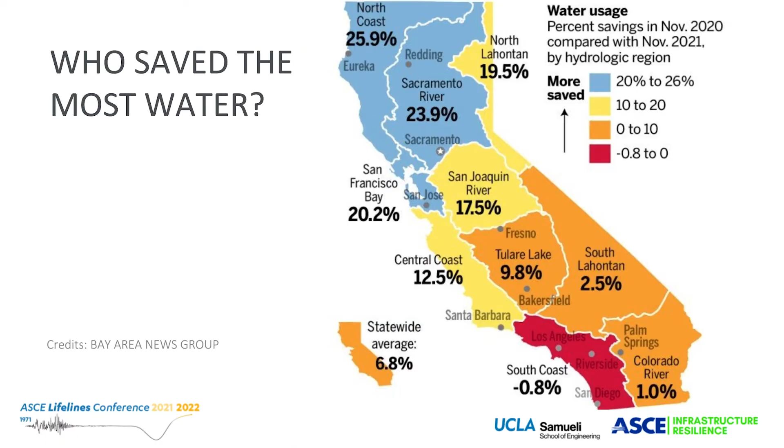So what's the common thread between hosing off your driveway, watering your lawn, and washing your car, spending a lot of water? They all will cause you a fine soon in California because of the drought and the shortage in water. And that creates quite unique situations with articles like this one from the Bay Area News Group. Who saved the most water? Is it the North Coast, the South Coast? I'm not here to comment on that. But it's really a sign of how important water conservation and water quality has become.

And as a result, cities have come up with clear environmental, social, and governance targets, ESG targets. San Francisco has extremely ambitious goals of reducing emissions by 40% in 3 years. Los Angeles, 55% in 3 years. And other cities have very, very demanding targets as well. I'm not going to go through all of them, but San Jose, Oakland, and whatnot.

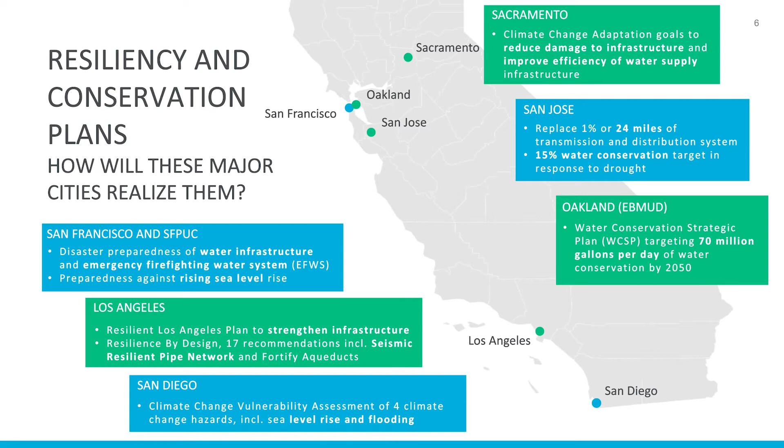And there's also resiliency and conservation plans. San Francisco and SFPUC have a disaster preparedness plan for their water infrastructure and their emergency firefighting water systems. Los Angeles has a similar system. San Diego is looking at sea level rise. Sacramento has extremely challenging goals as well. And San Jose wants to replace 1% of its water main network every year. Not to talk about Oakland and EBMUD, who has a target of 70 million gallons per day of water conservation soon.

So that begs the question of how are we going to address the aging water infrastructure issues without the impact? So how will we change 1% of water main per year and reach all those environmental goals, emission goals and whatnot? And I took two pictures that tell it all. You've got on one hand, open trench replacement, a picture taken a few summers back in Montreal. You see those stores, they're all closed. They all went bankrupt. This is a job that took almost 3 summers to do, and all those businesses have closed, or almost all of them, like 80%, okay?

And I'm not talking about the local communities, the houses. How do you access your home when you live there? It's very important. When it's necessary, you ought to do it. But when it's not, why would you do that? You look at a trenchless cured-in-place pipe replacement job, in this case, a California job that we did on the coast 3 years back. You see the job, this is one of our trucks, and you see the other access pit. There was almost no footprint, no impact on the roads. People could access their homes. So that's what trenchless replacement offers.

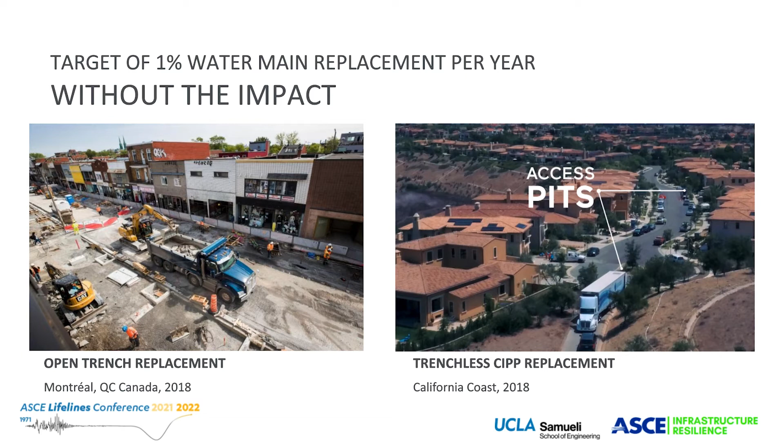So for those who are not familiar with trenchless technologies, here are a few of the steps that you need to go through for a job. So first of all, you access the pipe through pits. Then you locate the pipes and clean it with high pressure jetting equipment. Then you inspect it using closed circuit TV, and then you map all service connections, which you then plug to make sure that they won't be affected or clogged during the installation. And you use robotics because you don't want to dig each of those lines, each of those entries.

And then you install the product. It's a fabric that you install into the pipe. It's wet out with resin, and then we use cold water to blow it and conform it onto the host pipe. And then hot water for curing. It becomes hard, it becomes structural. And then you reinstate each service, again with our robotics, and you return to service after inspection and chlorination. And of course, pressure testing.

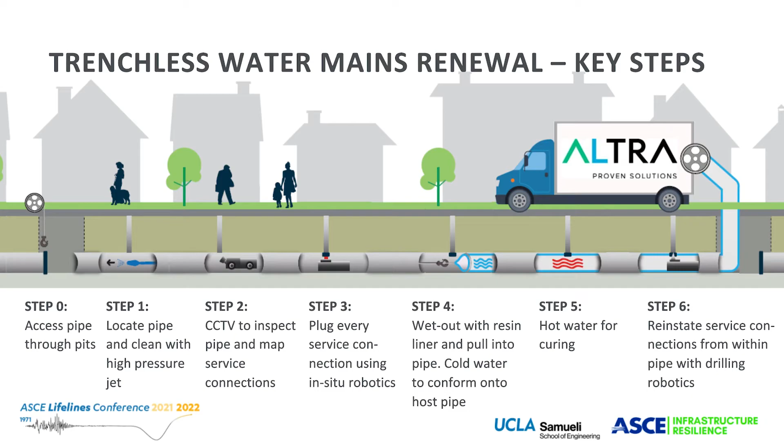Now, using a technology like that, instead of open cut or conventional replacement, you save a lot of greenhouse gas emissions. The impacts are tremendous. This is a third-party analysis done by Sustainable Development Technology, comparing greenhouse gas emissions in CO2 emissions for conventional replacement and structural trenchless rehabilitation technology.

And by doing so, you go from 400 million tons of CO2 equivalent per mile down to 66 using our technologies, 84% lower. If you translate it into 68 miles per year, which is a target that a city as large as Los Angeles could have, our technology could help save 23 kilotons per year of greenhouse gas emissions, 65 tons of other types of atmospheric pollution like VOCs, NOx, and SOx, and 2.2 million gallons of fuel.

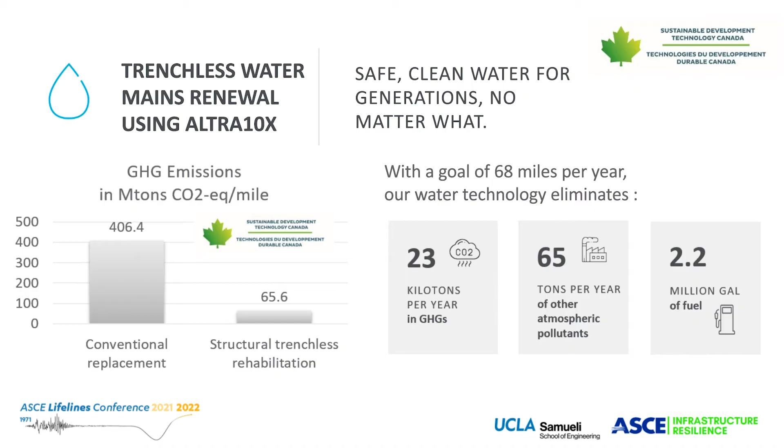And by doing so, they reduced their number of water main breaks by 80%, from 80 to, let's say, 20 or 15. Huge impact. And all those water main breaks now occur in non-rehabilitated sections that were not lined with our product. So if you translate that into the same goal of 68 miles per year, that's 1.25 million cubic yards of drinking water leaks based on 7.5% non-revenue water. That's huge water savings every year.

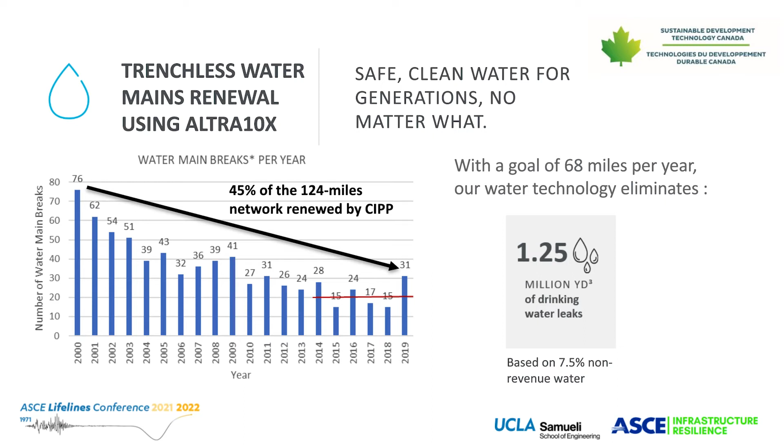And finally, installation statistics. This is the social and the economic benefits. A single crew in one run could install up to 800 feet of product, renew 800 feet of water mains. That's 1,500 feet per day per crew replaced. Nothing beats that. And so far, using our technology, we've replaced close to 1,400 miles of water mains since 2000. We did 70 miles last year, despite COVID.

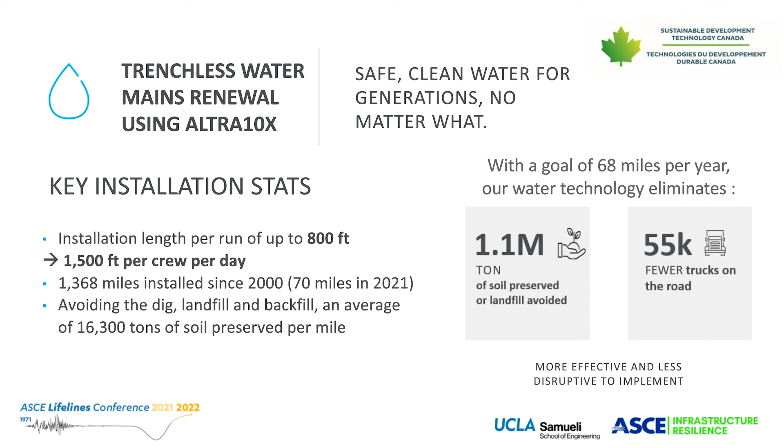And because you're not opening the street, you avoid the dig, the landfill, and the backfill, for an average of 16,300 tons of soil preserved per mile. With the same goal of 68 miles per year, this is 1.1 million tons of soil preserved or landfill avoided. That's 55,000 fewer trucks per year going around in our downtown areas, where this technology applies the best. So that's a very tangible and very clear reduction in disruption that a technology like that can offer to cities, businesses, homes and residents.

Now, a word about the material. It's a structural, cured-in-place pipe liner. It's called Altra 10X. It's a composite material, very similar to aerospace grade material. It's based on a woven polyester fiber and a glass fiber jacket. It has an internal watertight polymeric membrane that's specially designed for potable water contact for 100 years. And it has a thermosetting resin, an epoxy, which upon curing gives it its structural characteristics.

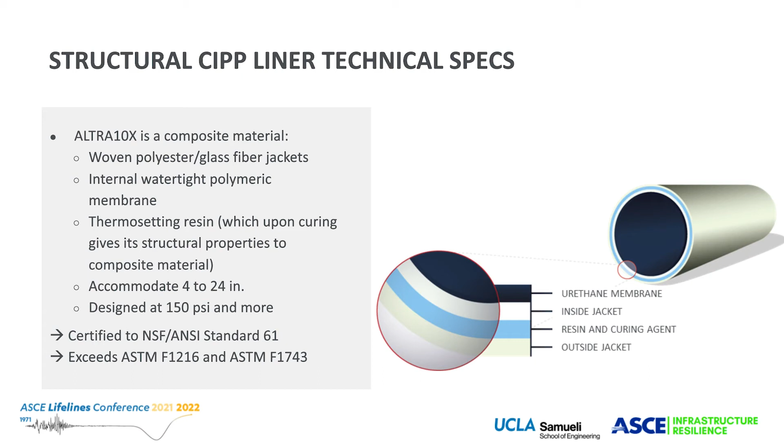We're able to accommodate from 4-inch to 24-inch, and it's generally designed for 150 psi operating pressure or more, depending on the case. And it complies with all standards required in the States. And you see the structure on the slide here of the urethane membrane, the inside jacket, the resin that wets it out, and the outside jacket.

With our product and our company, you get a unique integrated solution. We're the only company of our kind that is vertically integrated, where we own the product design, all the IP. We do the manufacturing ourselves in our plants from the raw materials, from the individual fibers, and we install the product throughout North America. And by doing those three activities, we gain an expertise that is unmatched in the industry.

Our design is based on a circular weaving that is seamless. You see a circular loom here. There's no suture, no assembly, no seams, and that provides extreme reliability and resiliency of our product. It's a strong composite material, and we, as I said, have proprietary resin formulation and production.

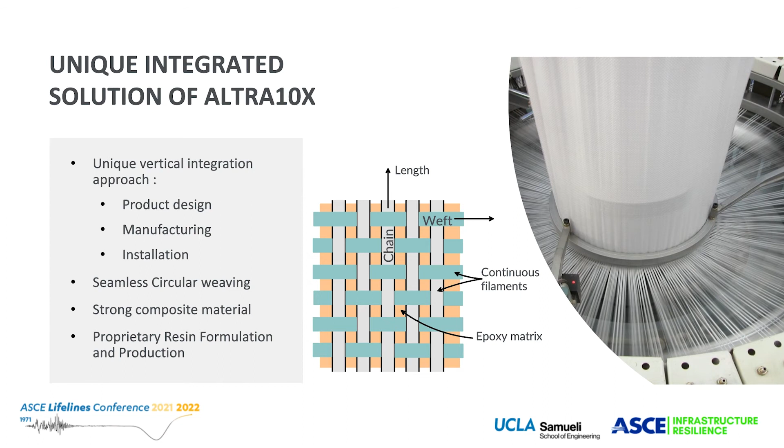Now, using materials like that, related to structural class 4 lining as per the American Water Works Association nomenclature, we know that we can increase pressure capacity and flow rate. You see a pipe before it's cleaned and then after it's lined with our product. It's obvious that the flow rate will be amazingly improved.

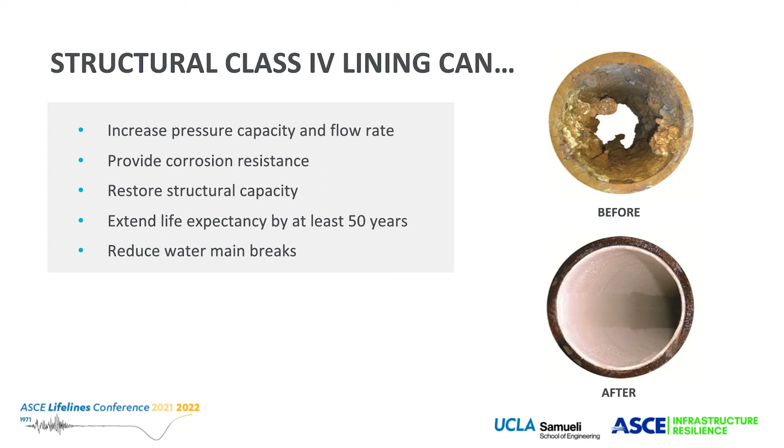It provides corrosion resistance because this is not prone to any type of corrosion. And it restores structural capacity. It will extend the life expectancy by at least 50 years. We're working on the demonstration for 100 years. And it's going to reduce water main breaks, as I've shown earlier.

But the question we ask ourselves, and that people in California have asked, is, can our material provide the resiliency to water mains against very severe soil movement, like earthquakes, for example? And that's what we tried to address in this program. And where better could we have gone than Cornell University?

This university and the Geotechnical Lifeline Large-Scale Test Laboratory needs no introduction. It's the go-to place for testing against earthquake resiliency lifelines, and that's what we did at Tom's lab. And he'll be presenting the whole program and all the results that we obtained with our product. Now, just an introductory comment.

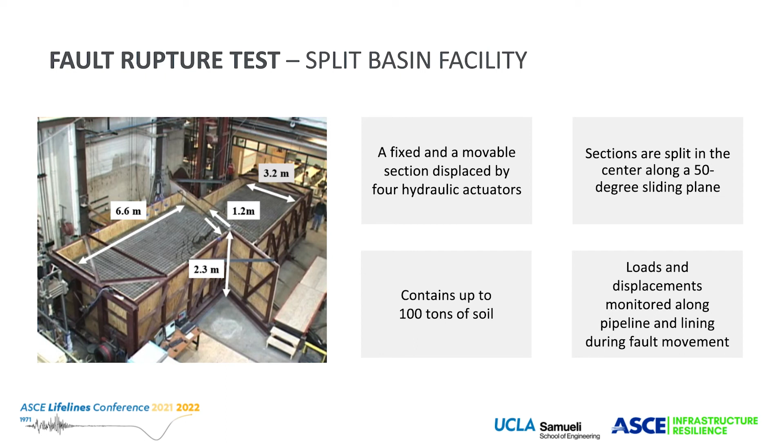So this is the fault rupture test that we did at the split basin facility. You've probably seen a picture like that. You see the basin. The bottom part of that picture, that basin, actually moves under the action of 4 actuators. And that's moved to shear a product that would be embedded in that basin, a pipe, for instance. And that's what Tom will be presenting us about later on.

Now, you're going to see a movie here. It's the recording of the test that we did on our product. You see a top view of the basin. And as it's going to play, you're going to see both sides of that basin aligning as the basin moves and the product is sheared. And you'll see that it goes to full extension, both sides aligning completely, because the test was not stopped.

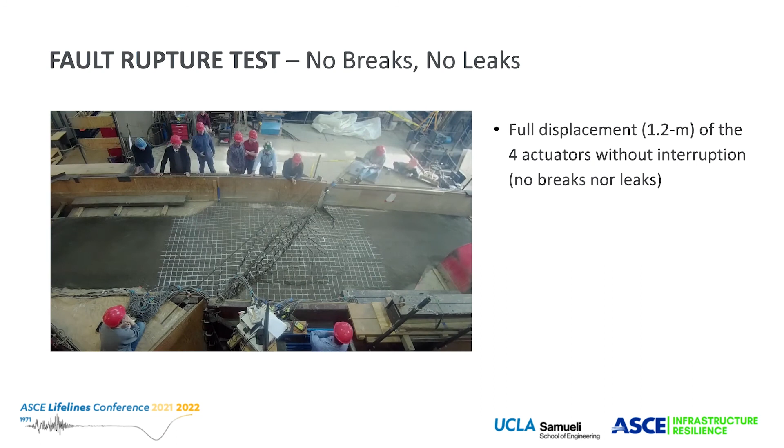Why was it not stopped? Because there were no breaks, no leaks. The product survived the full test. That's actually disappointing for those who designed it, because it's meant to break pipes, not to let pipes survive. So that's very interesting. And we're very proud of the results we obtained. Tom is going to talk extensively about the results.

Just a word. You see the pipe once it was unburied. You see how sheared it was. You see how intense the deformation was. The elongation was tremendous, almost 40 inches in length. Actually 6% of elongation that was permanent on the pipe. Obviously, all the pipe joints failed, but it was bridged by our product and therefore did not fail.

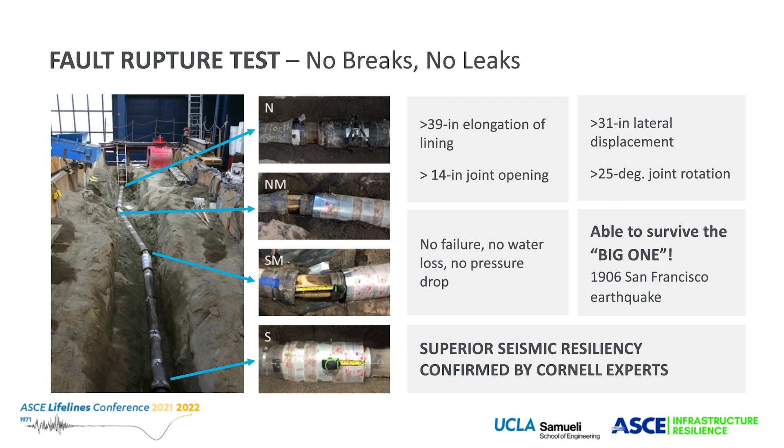You see the type of joint opening and joint rotation that we got during the test. Very, very important, very intense. Yet, no failure. And the conclusion was that it would have been able to survive the big earthquake that we unfortunately expect perhaps in the future in California. And in particular, would have survived the 1906 San Francisco earthquake. This is superior seismic resiliency that was confirmed by Tom's team at Cornell.

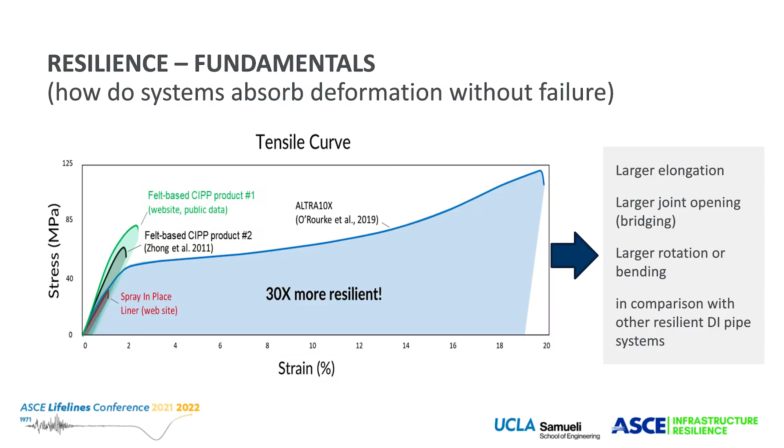And as a result, it led to larger elongation, larger joint opening, larger rotation or bending in comparison with any other trenchless technology product, or even any other resilient pipe systems, including ductile iron pipe. We're very proud of that.

Now, using a product like that, you get from a trenchless technology very little impact on the environment and very little disruption to traffic and local businesses. You've got earthquake resiliency. You've got 100 years of duration of your product. You have a structural composite that will not break, that will not corrode, and we help you reach your ESG target and your water conservation and resiliency target without adding one more pipe in the ground.

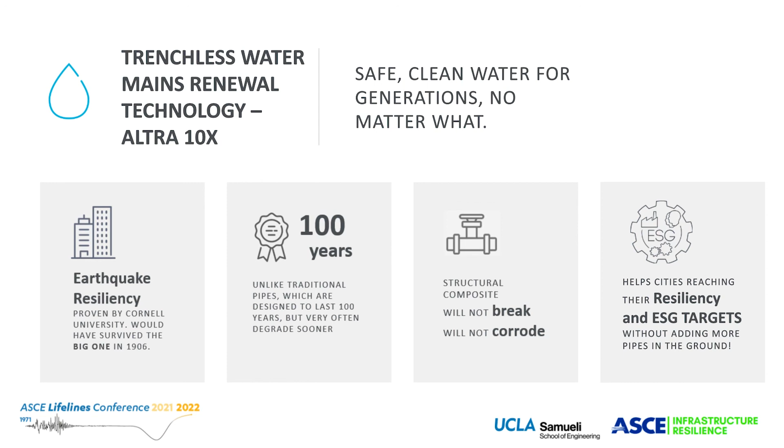With that, I hope that the presentation of my collaborators, Katie Miller from SFPUC, David Katsev from EBMUD, and finally Tom O'Rourke, who will dig into the results of our program, will convince you that this is a great technology that can help you reach your targets.